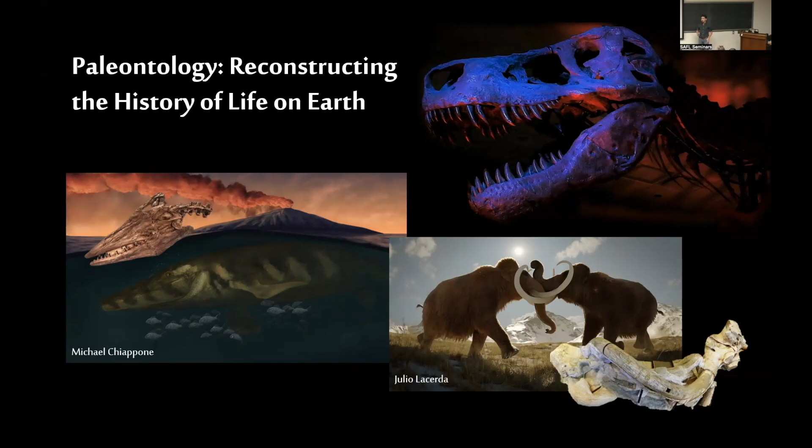Back in the 1940s, this guy, Ivan Yefremov, a paleontologist from Soviet Russia, pushed forward the idea that we need to understand where our data comes from, and invented an entire subfield of paleontology called taphonomy, which is my main focus as a researcher. He noted that taphonomy essentially concerns itself with the transition, in all its details, of organic remains from the biosphere to the lithosphere.

How does something that is alive become converted into the fossils that we actually pull out of the ground? That is what this entire subfield concerns itself with, from the moment an organism keels over and dies, all the way to when we pull it out of the ground in order to study it, and some people even argue beyond there into things like museum collections.

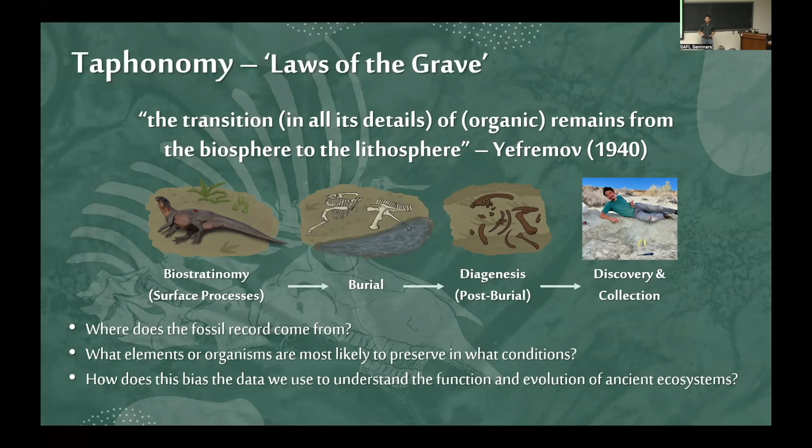Where does the fossil record itself actually come from, and what biases underlie it that we really need to be cognizant of when we're trying to understand how life on Earth has evolved? Within that realm, my specific area of study, which makes a lot of sense for SAFL, is the fluvial realm. In the terrestrial world, over half of all the vertebrate bone beds that have ever been found are from rivers and their floodplains.

If a bone is in water flow of any kind, it's often going to experience some level of transport, and if it's an entire skeleton, sorting based on what bone it is. This affects paleoecological hypotheses that we can actually make in the fossil record. Did the fossil assemblage that you're finding in a given place start out there? Did those organisms keel over and die in the local area, or have they been moved some distance that suggests that ecologically you can't trust that they lived there?

Are certain bones more likely to be preserved than other ones? That affects what data you have to work with. These are important questions for rivers specifically.

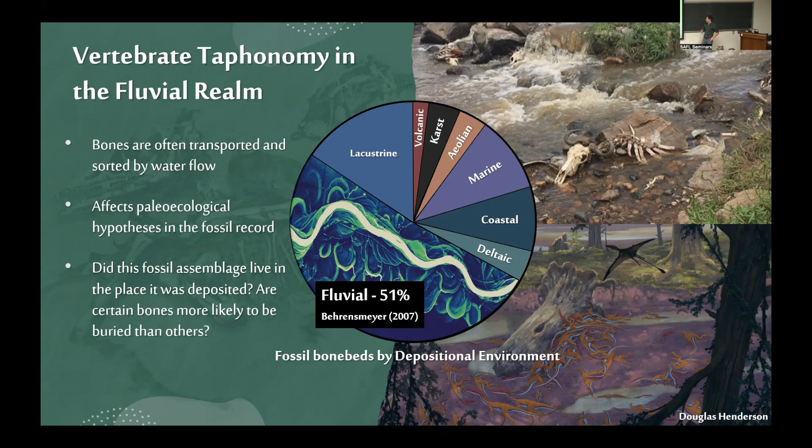It turns out that SAFL is kind of a perfect place to test this kind of thing through experimental methods, which among paleontologists are generally not common. But among taphonomists, experiments are actually a great way to examine this kind of thing. People have done things like decay experiments, transport experiments, burial experiments, all sorts of different things. And SAFL is uniquely positioned to explore questions about how bones move, sort, and bury in fluid flow.

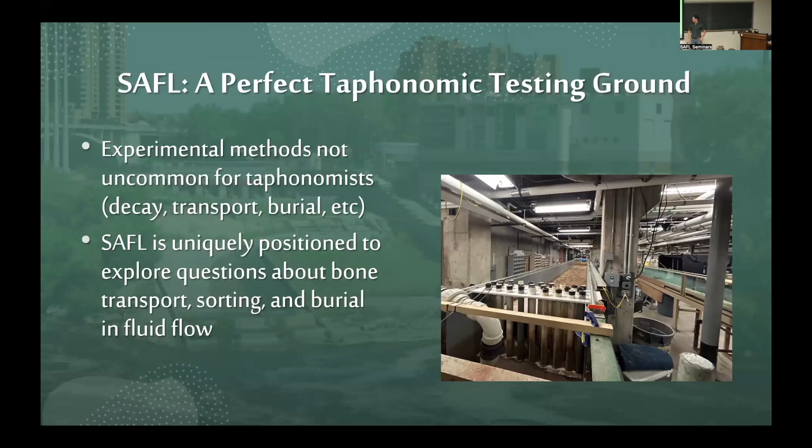That's where we started. Early on was in the main channel downstairs, the 3-meter wide by 80-meter long flume that we've got, where we decided to start by testing what kinds of different flows that people have never tested before can influence bones. In this case, we tested what happens when overbank flows like levee breaches, crevasse splays, can move bones that are out on the floodplain.

And potentially bury them in a situation kind of like what you see here, where this levee has broken and water is now spread out onto the floodplain, depositing sediment along with it. We found a lot of really interesting stuff in this work that I won't go too far into for today's sake. But know that this research is actually about to get published pretty soon here in the journal Paleobiology, so feel free to look for more on that.

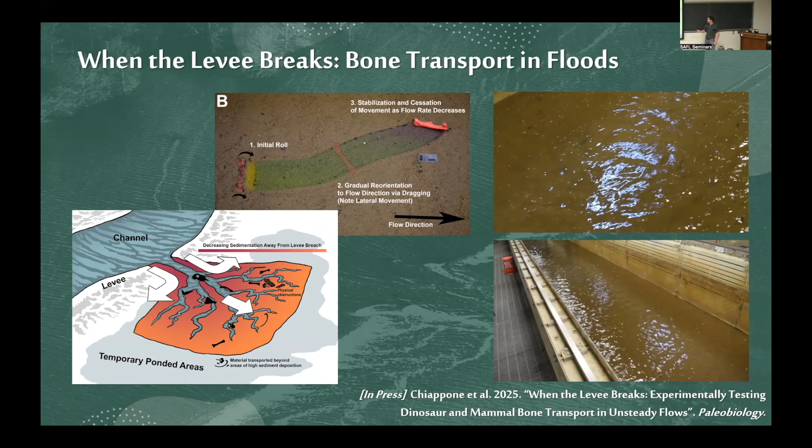Moving forward, what we've now kind of pivoted to is we've downsized our flume. We've ended up in what's called the tilting bed flume, one that's a little less than 1 meter wide, and really getting at the underlying processes that actually act to move a bone in any fluid flow, trying to see if we can predict, based on certain characteristics of the bones that we know, things like density, size and shape, what kinds of shear stresses it would take to move bones as objects, thinking of them less as organisms and more as weird sediments, basically.

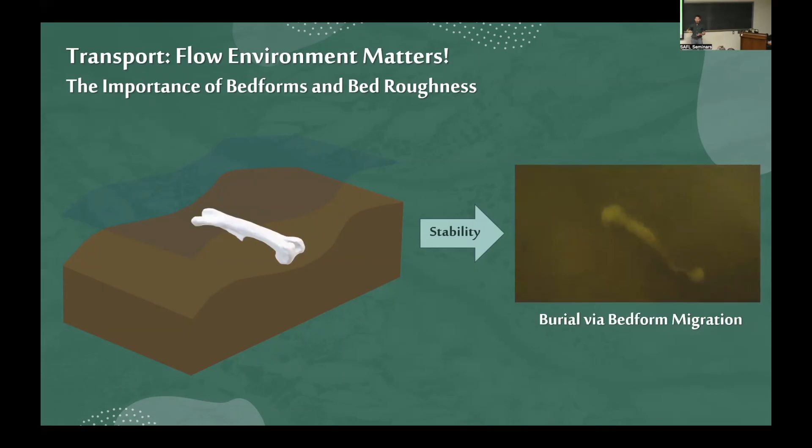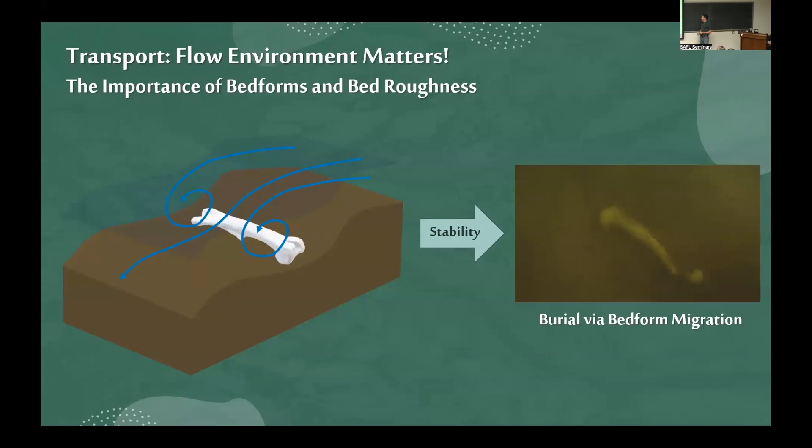We've noticed other things as we've done this more quantitative approach as well. We've noticed that bones have really important interactions with the bed form roughness around them, the things they're actually interacting with sediment-wise on the bottom of a river. Things like ripples and dunes that can trap them via eddying and things like that, as well as bury them for temporary lengths of time, sometimes permanent, by their ever-forward march downstream. On top of that, we've also seen the effects of something called scouring.

If you don't know what scouring is, if you've ever been to the beach and you've stood in the sand as a wave is pulling away from you and you felt the sand rushing out from under you, that's scouring. It's basically when sediment is mobile around an immobile object, and what happens is that you create eddies around the back of the object that slow the water down in these recirculation currents. What that can do is if you have larger sediments like gravel moving around a bone, they can end up caught in those eddies and redeposit on the downstream side of your bone.

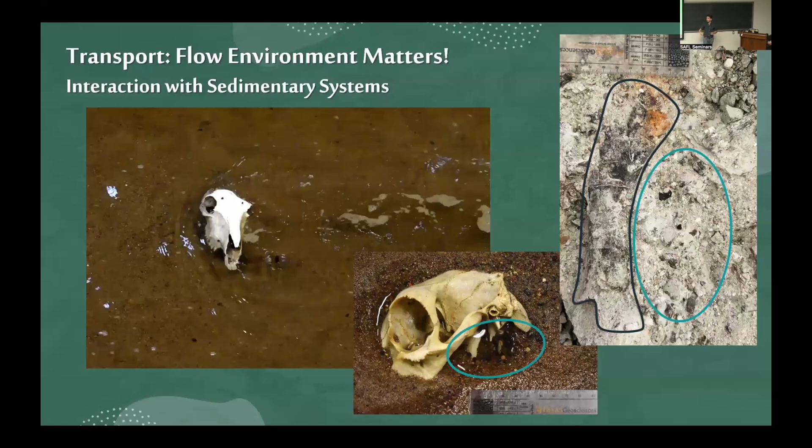Recently when I was out in the field, I saw this firsthand at a real-world dinosaur site, in which multiple bones showed packets of pebbles on one side, assumedly the downstream side. What we can do is combine this qualitative examination of fossil sites with the quantitative methods we're building, in order to see, for instance, if we know how much shear stress it takes for a bone to move.

We can compare that to how much shear stress it takes gravel to move, and test that scouring hypothesis. Would the gravel have been moving when the bone wasn't? Is the bone harder to move than gravel is? In this case, it turns out that it was. So it may be possible to use the surrounding geologic context to actually constrain flow conditions relative to the bones themselves that we see at real-world fossil sites, really taking this to a new quantitative level.

Overall, what I really want to emphasize today more than anything else is that the fossil record is humanity's window into understanding how ancient ecosystems functioned and how they evolved. These fossils that we use to understand the fossil record are found in a geologic context, which represents the landscapes they were deposited on. And because of this, understanding how fossils are actually preserved really impacts how we can interpret them and what data we can use for what purposes.

Not only this, but taphonomic processes actually still happen today, and they're used to learn about modern ecosystems and even sometimes human issues—things like forensics, and archaeologists use some of the same methods we do all the time. On top of that, fluid mechanics are also really important on complex shapes in general, not just bones. So this may also be applicable to other non-bone objects, especially cylindrical objects in fluid flow.

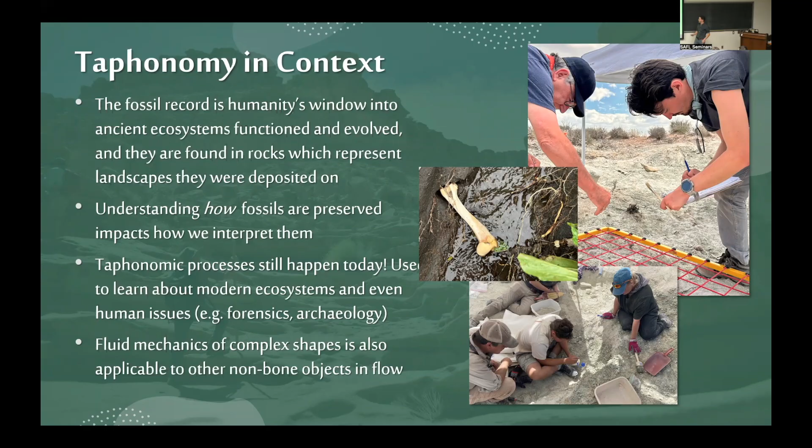And so with that, I will go ahead and wrap up. Thank you all so much for stopping by to watch, and that is just how the femur tumbles. Thank you.

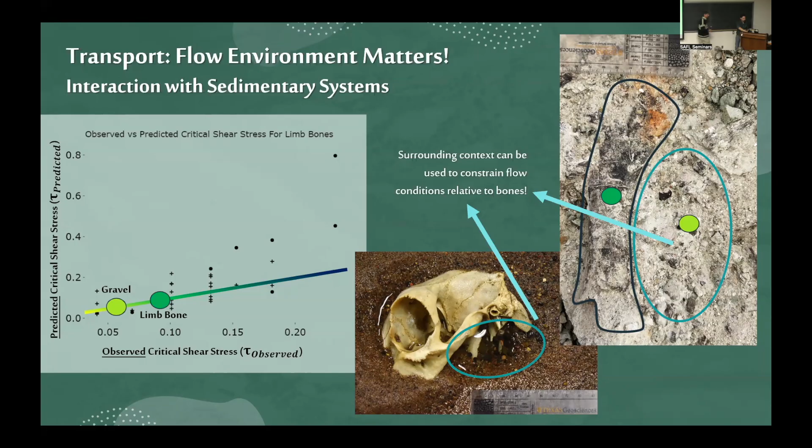Let's see, all right, just get that out of the way.

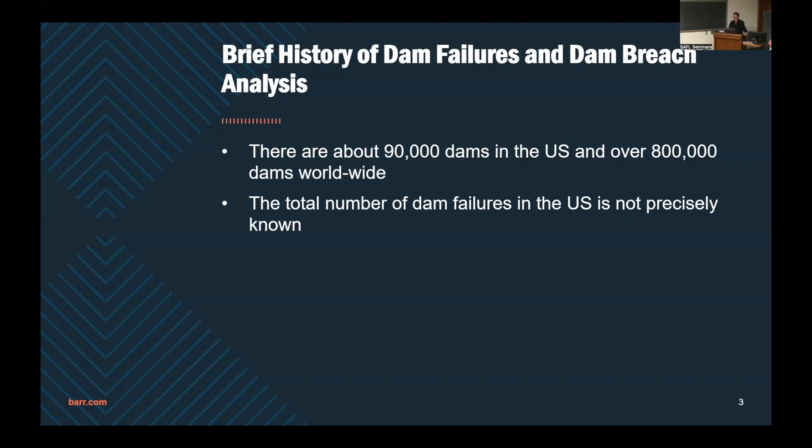But somewhere around 800,000 dams worldwide. And total number of dam failures in the US, we don't know it. But the National Performance of Dams program of Stanford University, they have been reporting there has been an average of about 10 failures a year over the period of record. And when we talk about period of record, the earliest dam failure on record goes back to 1848 for Bancroft Dam in Massachusetts.

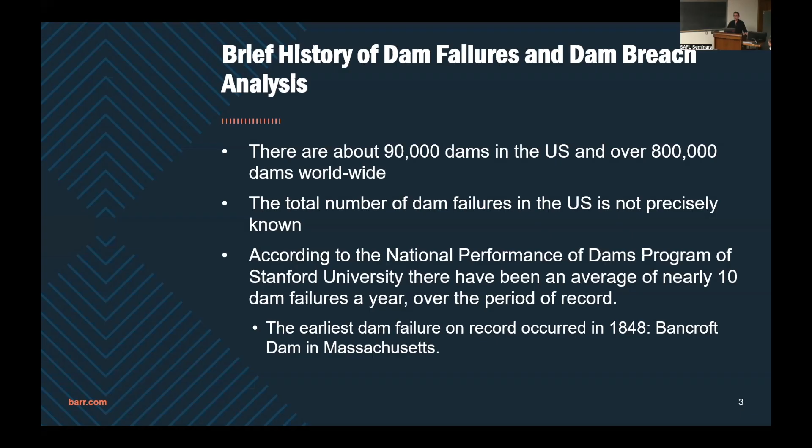The truth is, the majority of dam failures do not result in any fatalities. Something around 96% of them, they don't. It's a very small percentage of those dam failures that have fatalities. And not all dams fail - at least based on the records that we have, not all of them fail. It's true that humans have built dams since 5,000 years ago, and many of them are not there anymore, but there's still some from the Roman era.

So I'm going to bring up some important dam failures. These are all water retaining dams that happened in the United States. The first one is 1874, the Mill River Dam in Massachusetts, which resulted in 139 fatalities.

Then in 1889, the South Fork Dam failure in Johnstown, Pennsylvania. This is actually close to where I'm living, in Pittsburgh, a little to the east. This dam actually failed twice, and the second time in 1889 was probably the worst event as far as fatalities related—more than 2,200 people died in that failure.

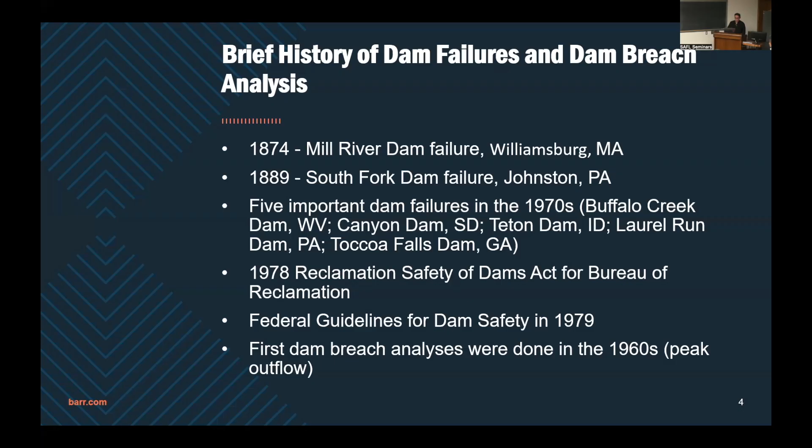As part of that, dam breach analysis began. But dam breach analysis did not start in the 1970s—it started in the 1960s due to some failures that happened in California.

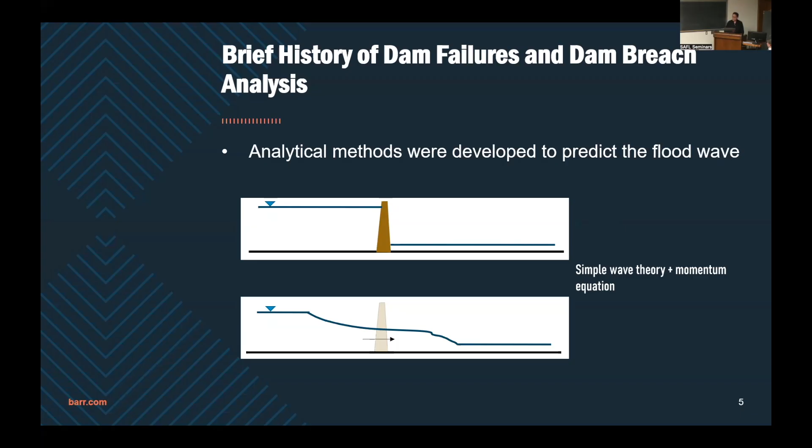Initially, there were analytical methods, and these were quite simple because they had to find a solution to the problem. Looking at a channel as a hydraulic problem, you have an obstruction in front of water, and if you remove it, there is a flood wave that travels downstream. They did this using simple wave theory plus the momentum equation, with no dissipation of energy—it would basically tell us the height of the flood wave and the speed of the wave going downstream. Then, in the 1980s, they started developing computer programs and empirical parametric models based on previous records.

In addition to that, a lot of physically based models were developed. The main one was BREACH, developed by Fread. Fread is known as the father of dam breach analysis. The first dam breach model program was prepared by Fread, and the physically based model for breach development was also by Fread. It looked at erosion—shear stress and the material of the dam and how it would erode.

Then software programs started coming in—1980s, 1990s, 2000s—and it was not easy to work with these programs. The National Weather Service dam break model was quite a challenge to work with, until HEC-RAS came with a nice GUI. I know when I talk about these things, for many of the younger graduate students here it may seem a little foreign, but things that seem very easy to work with today were not easy at that time. That's a fact. And for your information, many of them are still not easy to work with when it comes to dam breach, because of the hydraulic problems associated with them.

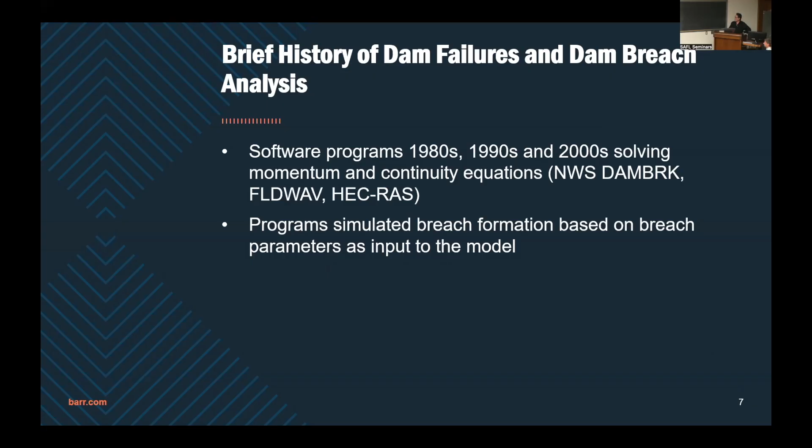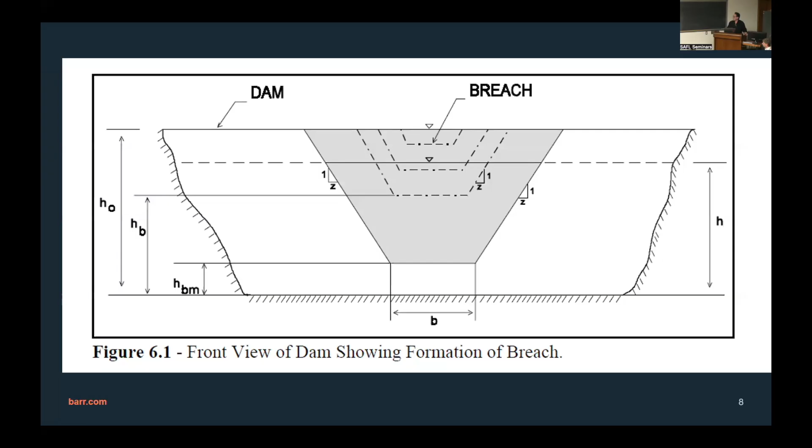So the programs also started developing for the breach formation. In all these programs, they would simplify the story, saying this is basically a trapezoidal shape, and if you have overtopping, this trapezoid would start developing from the top all the way extending to the bottom and also expanding laterally. Some simplifications, trying to address the problem.

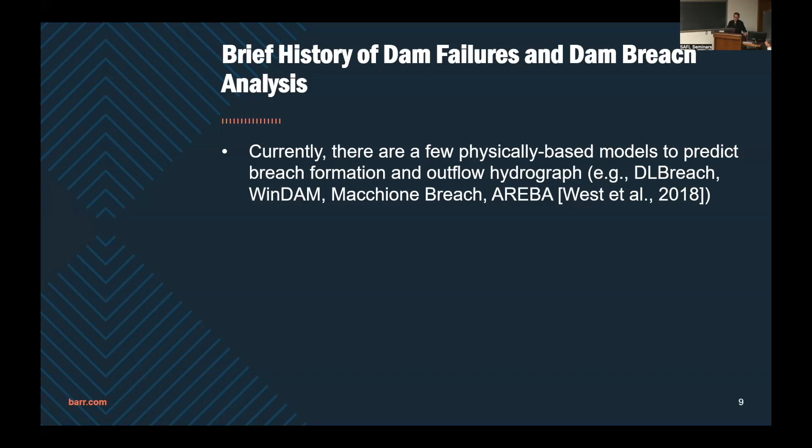Right now, we have a number of physically based models just to predict the shape of the breach. I've put some of these models here - probably the one being used most effectively is DL Breach, but there are a number of them out there. And there are lots of hydraulic models for just routing the flood wave.

Right now, we are using a lot of two-dimensional hydraulic models. It doesn't mean these models are there and they're doing a good job - you just put the input data, run it, and get the result. It doesn't work like that. Still, it's a lot of work, a lot of challenging questions, a lot of glitches. Sometimes things do not work the way you want because of all the data - we can collect a lot of data, provide a lot of details, we have other challenges, but by and large, we are doing a good job. The only thing we have problems with is just the breach shape.

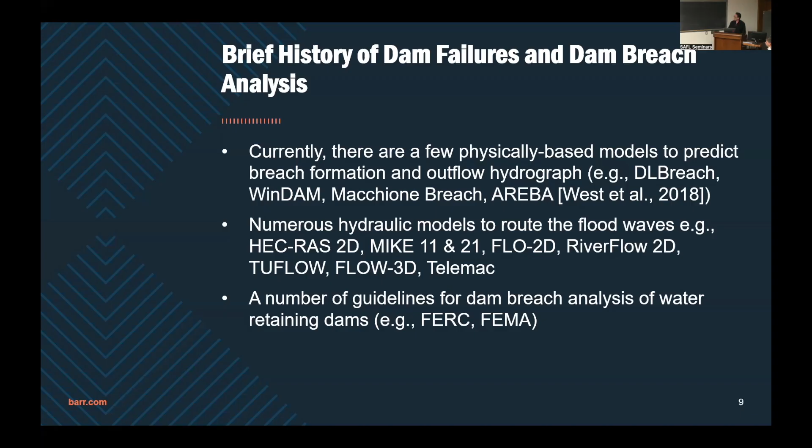In addition to that, we also have a lot of guidelines, especially from the federal government - FERC and FEMA - they have guidelines on how to do the dam breach analysis.

So now this is the question: what is currently understood about dam breach analysis for water retaining dams? The truth is we cannot predict exactly how a dam fails. We can simulate a dam breach analysis, but don't think we can predict it. We can't have the precise timing and extent of the dam breach - we can't forecast that, but we can go with the worst case scenario. We can say if the dam fails, what would be the worst case scenario? Based on that, we can use it for emergency action plans or emergency response plans, and that's also based on past events.

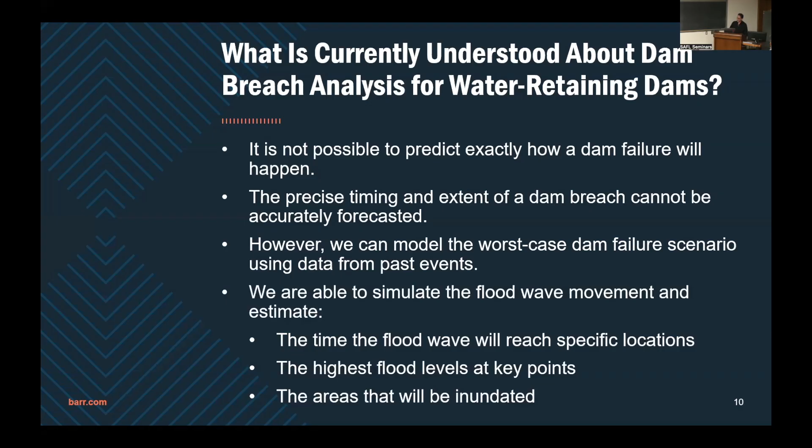And we can simulate the flood wave movement. We can get the time of flood wave reaching a specific location. We can tell what is the highest flood levels at key points and the areas that would be inundated. All these things are for developing an emergency action plan, whose main goal is establishing some monitoring system to detect potential failures, defining responsibilities for emergency responders and dam owners, and coming up with a warning system and evacuation system with inundation maps.

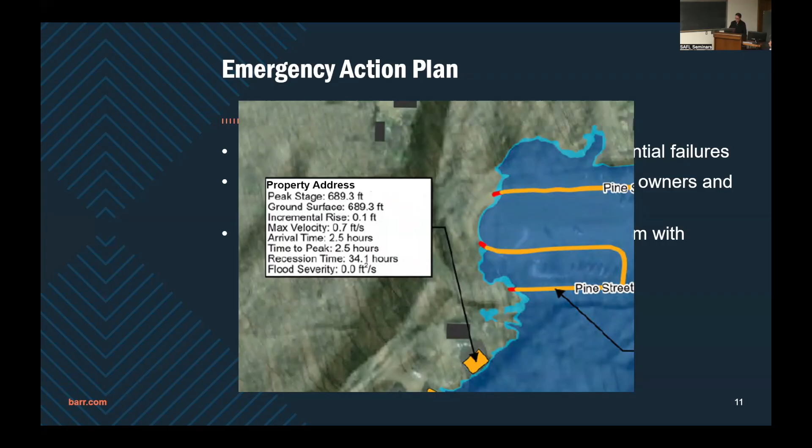But there are probably buildings for some dam failures that would experience a large increase in water level. We can provide these maps that will be used for emergency response plans, and eventually for preparing rescue, recovery, and termination of the emergency. We can do all these things, so we are in a good position with respect to water retaining dams. The main puzzle we have is just the breach formation - we make a lot of guesswork for that.

So we're good. What about tailings dams? Are they any different? Let's talk about tailings dams.

Tailings dams are used whenever you have a mining operation, whether underground or on the surface. You take the ore to the processing plant, which separates the minerals and brings the waste, putting it in a basin. Often the basin is constructed by making an embankment. They create a basin and bring the material, the waste, from the processing plant and dump it there. Because they often pump it, you get a little pond on top, and the tailings, the waste, at the bottom.

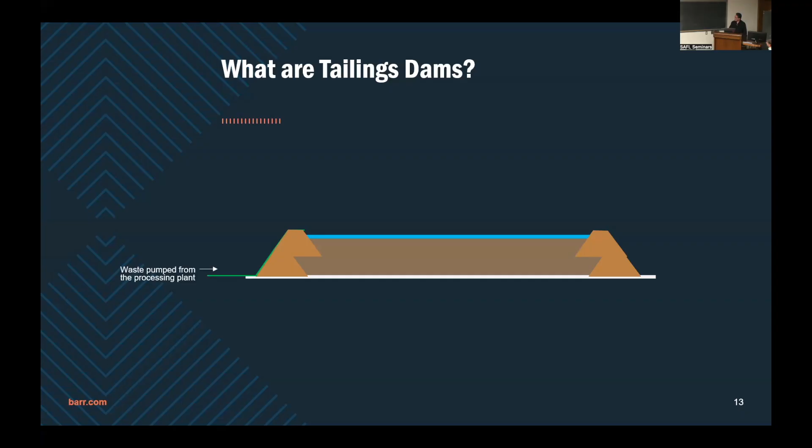They fill it up, and when it fills up, they may raise the embankment and put more on top. This becomes a tailings basin, and what you see around it becomes the dam. The pond is called the supernatant pond.

The method of construction is sometimes upstream. It's called upstream construction because they start with a starter dam, fill it with the tailings waste, and when it's filled, the next raise or lift of the dam sits on the waste that was already deposited there. So part of the dam is on soft material, or material that's not strong enough. These dams can go up quite a bit in height - you may see 100 to 200 foot high dams built on the waste. So it makes the dam not necessarily quite stable.

But there is also the central method. In the central method, they build on top and extend it to the downstream side, so part of the dam is on the ground, making it much more reliable. In the downstream method, there is nothing built on the tailings at all. This is much better than the central method with respect to firmness, stability, and our trust in the safety of the dam.

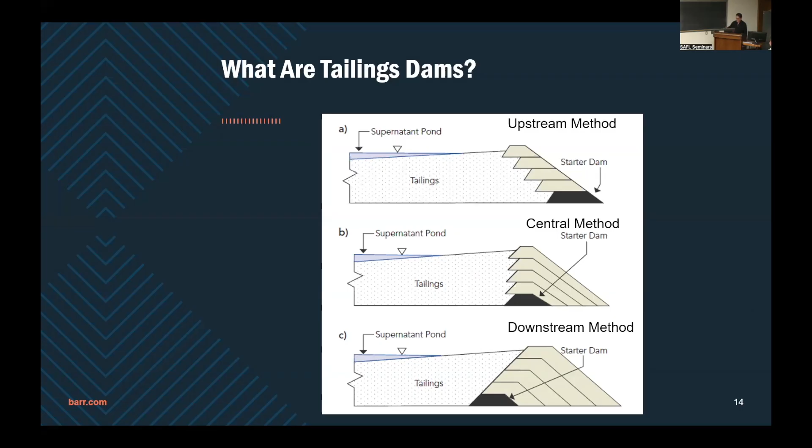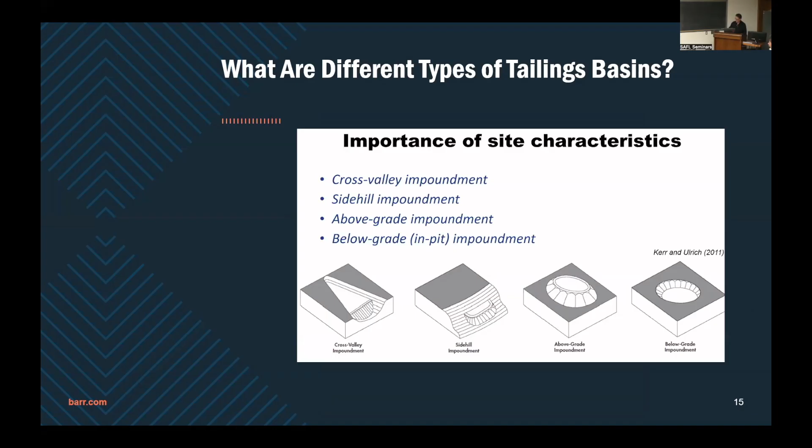Dams can be built basically on a cross valley. It can be in a side hill impoundment, or above the ground, which is a ring dike. Most of the dams in the Midwest, in Minnesota for example, are ring dike or above ground. As you go west, the mountainous area will have side hill construction. There are also some that are below grade - those are not dams anymore, just a tailings basin.

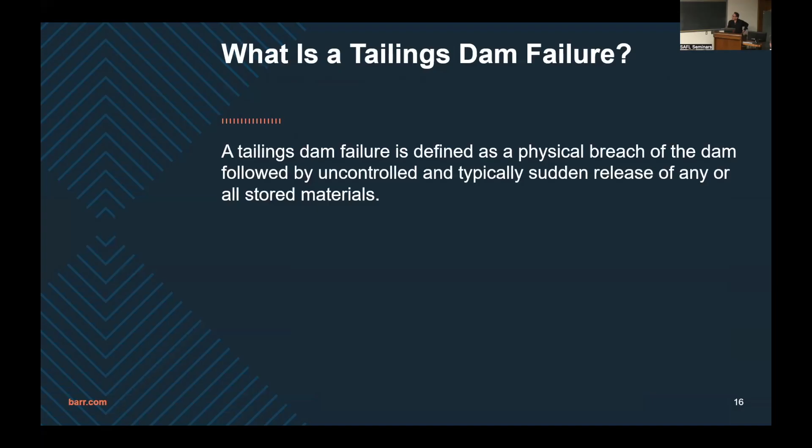When we talk about the failure of a tailings dam, the first part is very much the same as any water retaining dam. But then there's also the uncontrolled and sudden release of any or all stored materials. That's what makes the failure of a tailings dam quite different.

Going through a little history of tailings dam failures - this is my own selection, it doesn't mean other sources would give you the same list. Some recent ones, in my opinion 1960s is recent, I know for many of you it's not. In China, at Huogudu, about 3.3 million cubic meters of tailings was released with more than 170 fatalities. And El Cobre, Chile - 0.35 million cubic meters of tailings but 200 fatalities. So as you can see, it's not just the volume - the setting, the presence of communities, the topography, and the height of the dam all can have an effect.

That happened in 1965. In 1972, Buffalo Creek, West Virginia - 500,000 cubic meters, 125 fatalities. Italy, 1985 - 0.2 million cubic meters, 268 fatalities. China, 2008, Taoshi - almost 2 million cubic meters, 277 fatalities. And 2019, this was a big one - Brumadinho, 12 million cubic meters with 259 fatalities.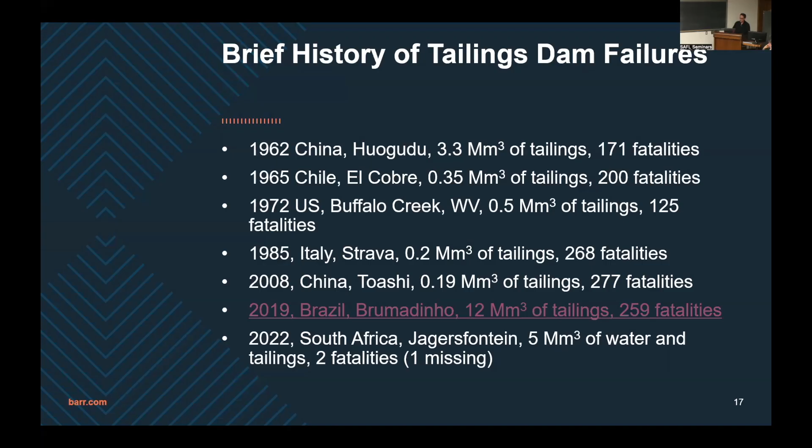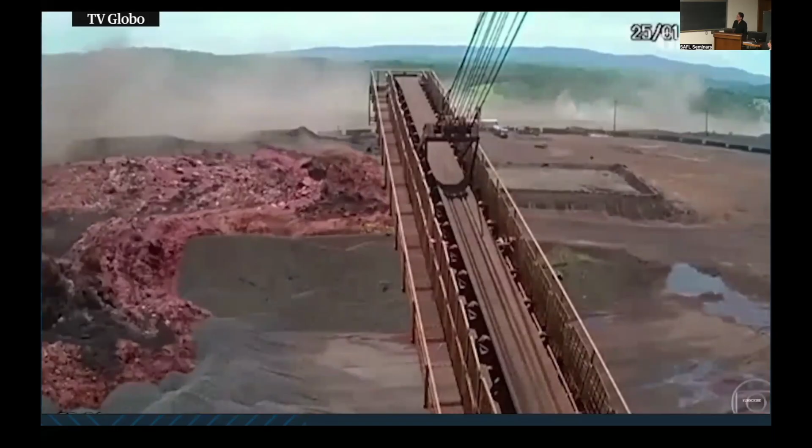In case you haven't seen this video, I'm going to show it to you to give a little perspective on a tailings dam failure. This tailings dam was not active. It happened in January of 2019. They had cameras installed at different locations - this is one of the quite unique cases where that happened, which is why we have videos of this dam failure. We don't have this type of video from any other failure.

Actually, that triggered quite a bit of effort on tailings dam breach analysis. A global industry standard was developed in 2020. CDA, the Canadian Dam Association, published the first bulletin in 2021. I don't think it was in response to that bulletin for tailings dam breach analysis. It started in 2015 and was completed in 2021, but the draft was referenced in the global industry standard on tailings management.

A short section was allocated in 2022 in the Tailings Management Handbook, a life cycle approach by the Society of Mining, Metallurgy, and Exploration. And then the International Commission on Large Dams, ICOLD, also published a bulletin - I think it's 2024, if I'm not mistaken. No, 2025. This one is 2025.

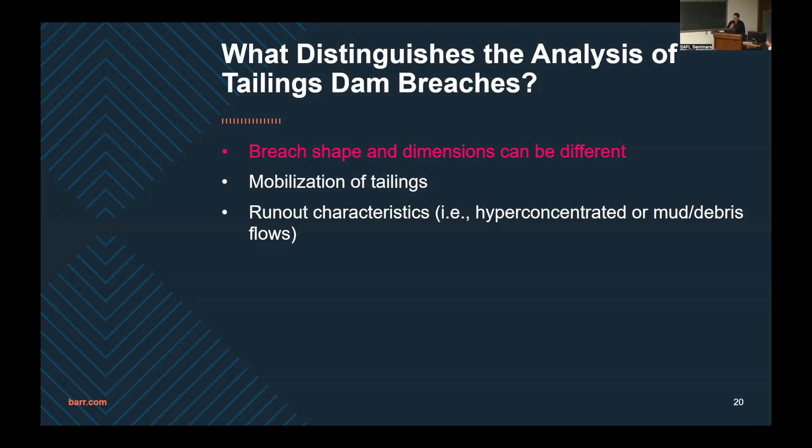The problem is the process is very complex. I'm going to try to show you in a cartoon why it becomes complex. What we saw for Brumadinho was a specific case. In most cases, what we're dealing with - it doesn't mean it's always like this - you have some tailings and some pond on top. There may be no pond, as we saw, and the tailings may not have the same characteristics as Brumadinho, but we can have quite a range. I'm going to show you why it becomes quite a challenging problem.

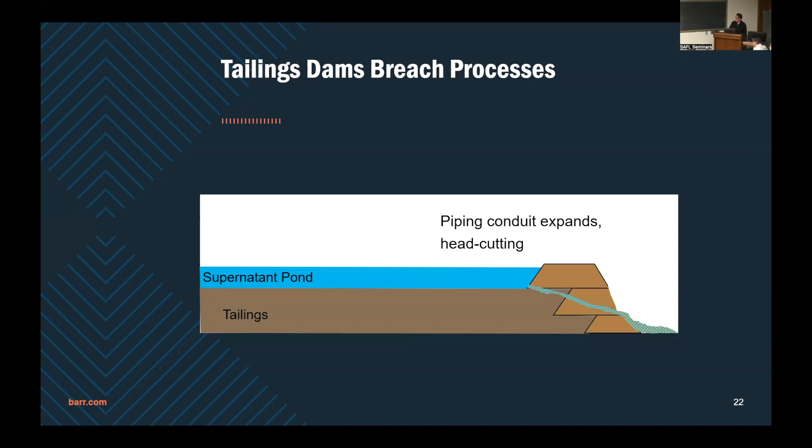Let's imagine we have a tailings dam with some initial piping, and that initial pipe conduit expands over time, causing head cutting at the downstream end. At some point it collapses that conduit, causing settlement of the dam, and you get overtopping, then the dam is washed out because of all the pond water coming out and washing off the dam. You get quite a bit of muddy flow or hyper-concentrated flow coming out of it.

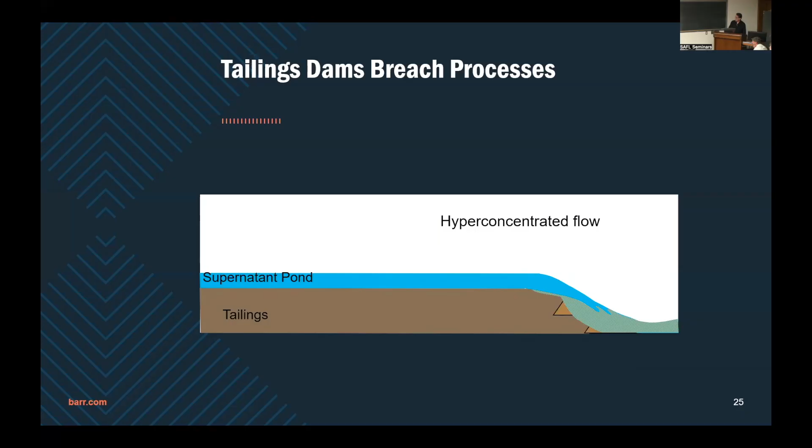But then, because of the stability problem with the tailings behind it, you may see an initial backscarp or just unstable tailings standing there. And when that happens, if the tailings are liquefiable, you may see liquefaction of the tailings, and then even more material comes out. How the liquefied tailings, the eroded tailings, and the water mix and come into play is a question that's not easy to answer. Right after that, if the pond is still there, you will have knickpoints causing more erosion, and more material comes out. So trying to get all that right is quite a challenge.

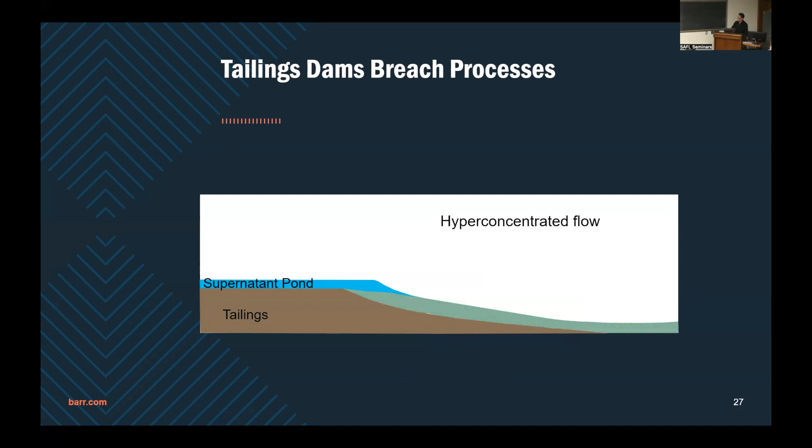And when this problem started being studied, we ran into lots of questions. But the first efforts were done by Rico back in 2007. What she did was look at 29 tailings dam failures, and she came up with a nice, simple linear regression. And she said, you know what...

About 35% of the volume of the material in a tailings basin will be mobilized, and that's what we can use. Initially it was used by some people, but after some time it was challenged because there were cases where only 1% of the material was mobilized, and in some cases the entire basin was mobilized. So everybody thought that this database was not a good one to build on, but this may not be the case.

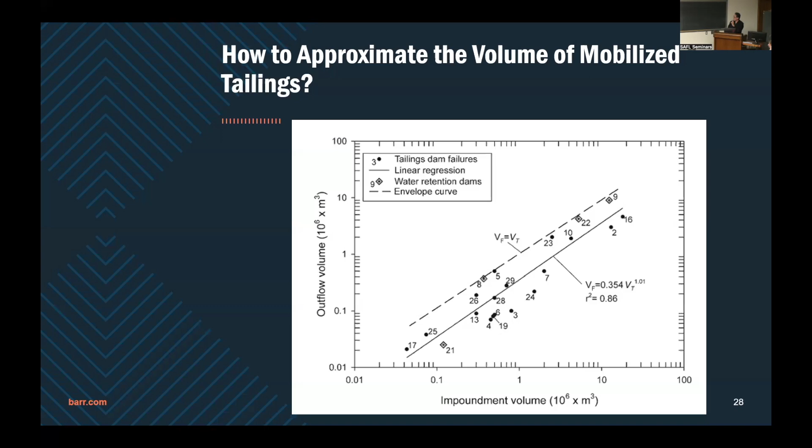So when CDA started working, they had a working group for tailings dam breach analysis. It was a combination of hydraulic engineers and geotechnical engineers, and there was quite a bit of effort to see how we can bring the estimate of mobilized tailings into the picture.

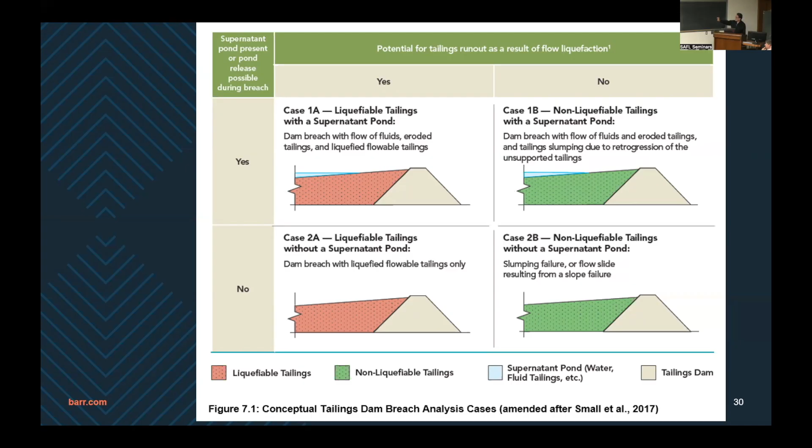Now if you look across this, 1A and 1B, the tailings is basically liquefiable for 1A, and for 1B it's not, but both of them have a pond. So for the ones with a pond, you definitely have erosion when the water comes out. With the ones that have liquefiable tailings, you can have liquefaction when the dam fails. The last one, 2B, is neither liquefiable nor erosional because there's no pond there, but if the dam fails, it becomes more like a landslide - more like a geotechnical failure that you can take a look at.

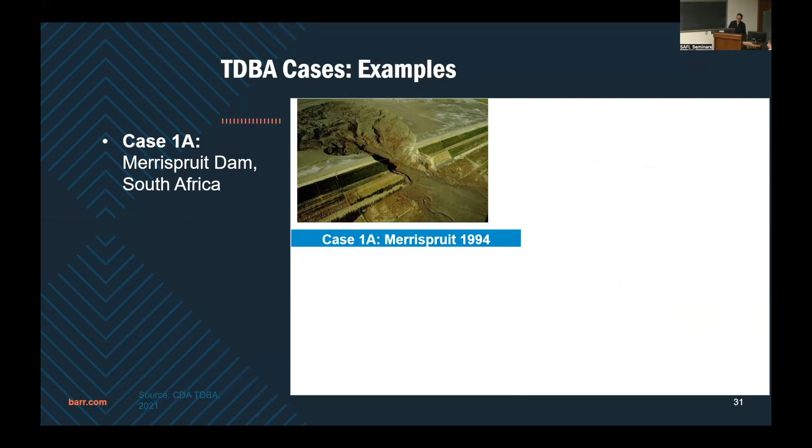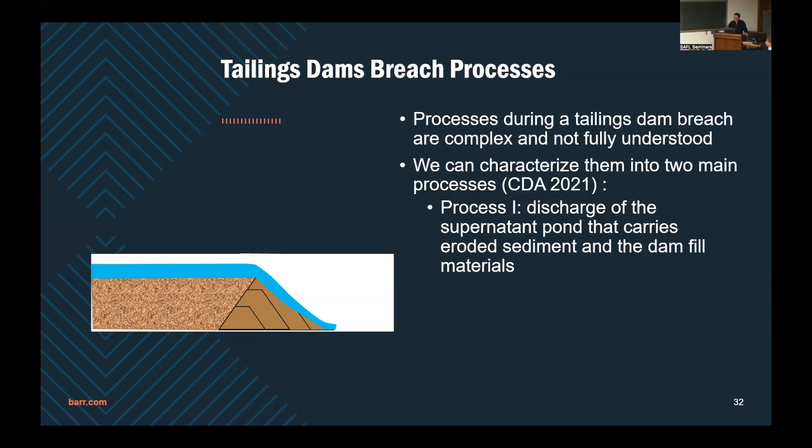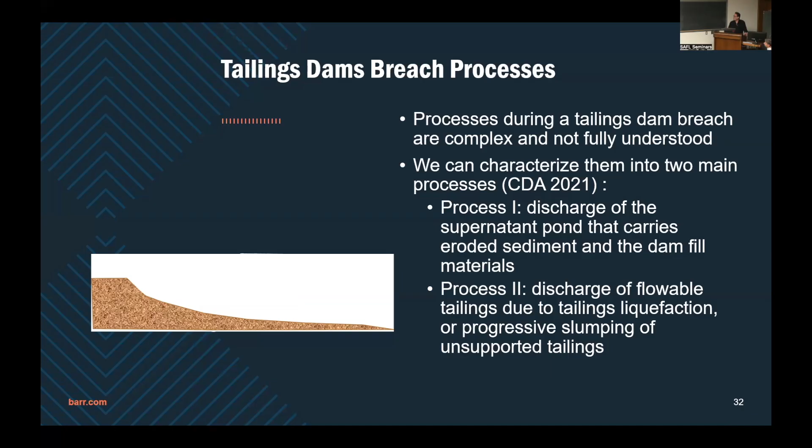So in CDA, they simplified it - because the problem is complex, we can simplify it and define two main processes. The first is the discharge of the supernatant pond, which basically brings out all the eroded sediment and dam fill materials downstream - that's process one. Process two is basically the discharge of all the flowable tailings, either due to liquefaction or progressive slumping. So these are the two processes that we can tackle in order to do the dam breach analysis.

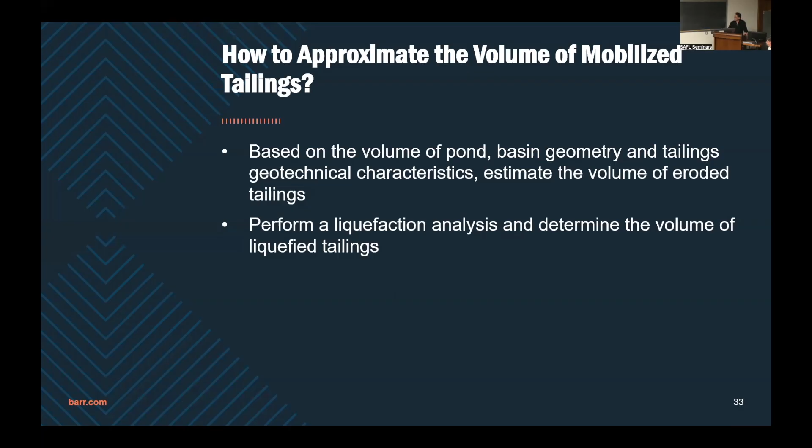So how do we approximate the volume of mobilized tailings? We can do it based on the volume of the pond - the water that we have there - the basin geometry, and the tailings geotechnical characteristics. Based on those, we can estimate the volume of eroded tailings. We also have to do some analysis to see if the tailings are liquefiable, do some liquefaction analysis, and determine the volume of liquefied tailings. So this is all quite a bit of work and help from geotechnical engineers.

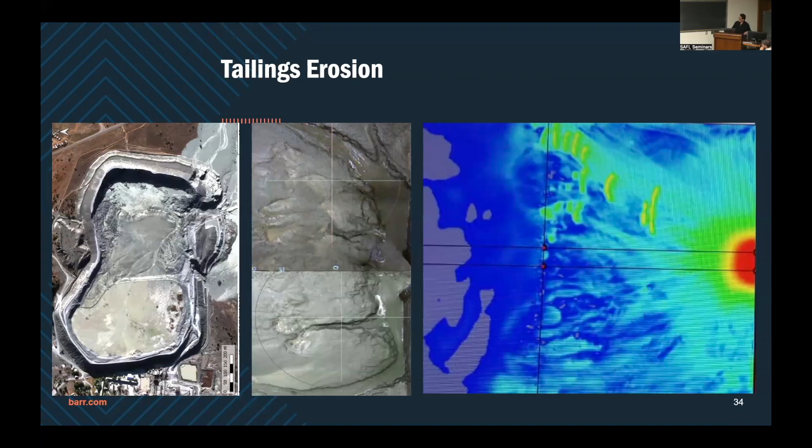I think this is an experiment done at Queen's University. This was basically looking at - I don't know how well you can see it - they put a notch here. This is the plan view, you're looking at everything at the basin. There is sediment upstream, but they put a notch and initiated the breach. They were looking at just the erosional processes.

If you focus, see how there's a cone of depression here, and you can see how it's going to expand as the breach basically advances and progresses.

As you can see, the failure that you see from the side of the channel of the breach - these are all geotechnical failures. When you try to come up with a model of only looking at the erosional processes, you miss these stability problems that you can run into.

So if you want to do a good job with respect to predicting dam breach formation, sticking just to hydraulic characteristics and shear stresses is not going to work. You have to look at the stability of the side slopes of the breach as it expands.

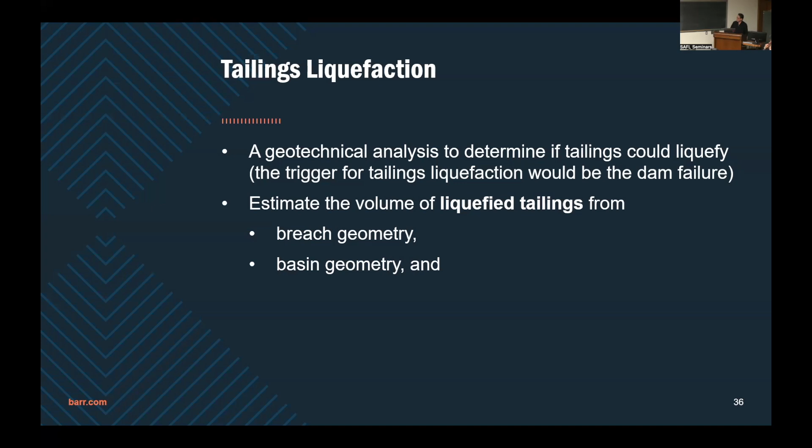So we can estimate the volume of liquefied tailings from the breach geometry, from basin geometry, and also the characteristics of the tailings. So if we have a ring dike, based on the breach opening and the characteristics, we can figure out what part of the basin is going to be mobilized.

There will be an initial backscarp, and with the liquefaction or basically progressive slumping of the tailings, we can estimate how much more tailings would be mobilized. In this case, we are trying to basically give you an example of the liquefied tailings.

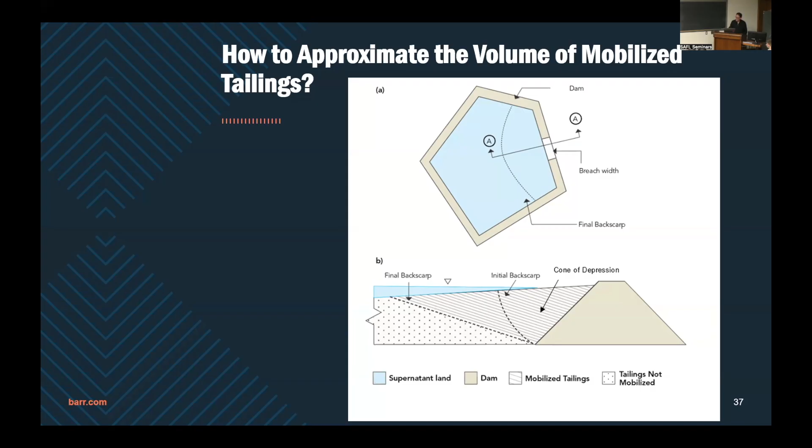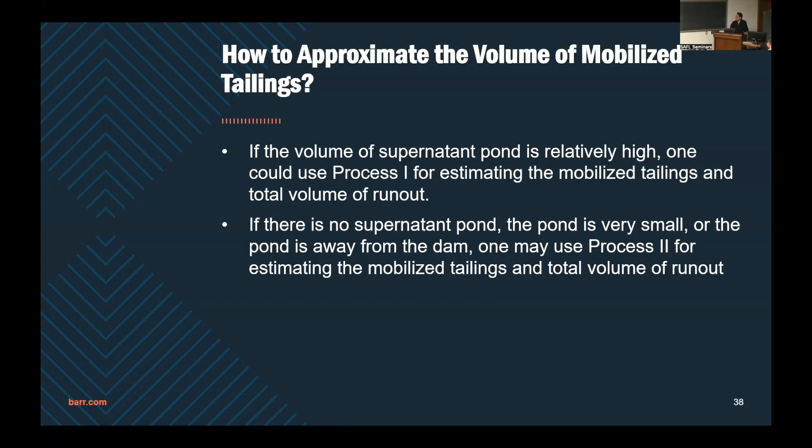We can also simplify the problem based on the characteristics we run into based on the supernatant pond. If it's quite a large supernatant pond, we can claim that that process one that I talked about is dominating, and just focus on that. But if the pond is too small or far away from the breach location, we can ignore that and just focus on process two, especially if we think that the tailings are liquefiable.

But in many cases that's not the case, and we have a pond, and we have tailings that are liquefiable. We can come up with an alternative approach: basically come up with these estimates and say that all the tailings that are liquefied and are eroded get well mixed with the water and they all come as one entity. In reality, they don't, but it's the easiest way to deal with it.

And if we do, now we have one fluid coming out of the system. We can model the flow of that fluid, and we can look at the impacts. That is an important part of this whole thing to make it work.

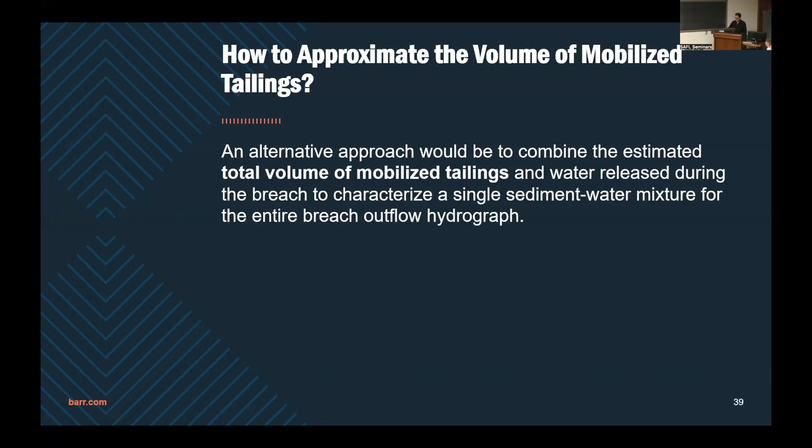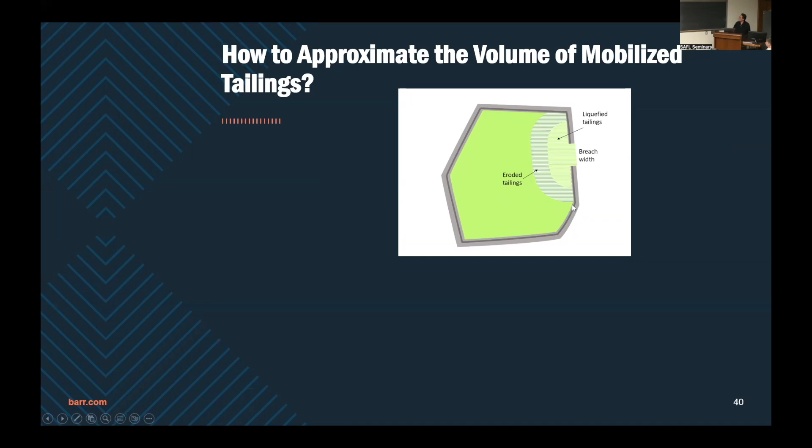So now if this is the basin looking from the top, and that's the breach opening, we can estimate what part would liquefy and what additional part would basically erode because of the volume of the water. In cross-section, if that's the dam, we will have some initial erosion of the first part.

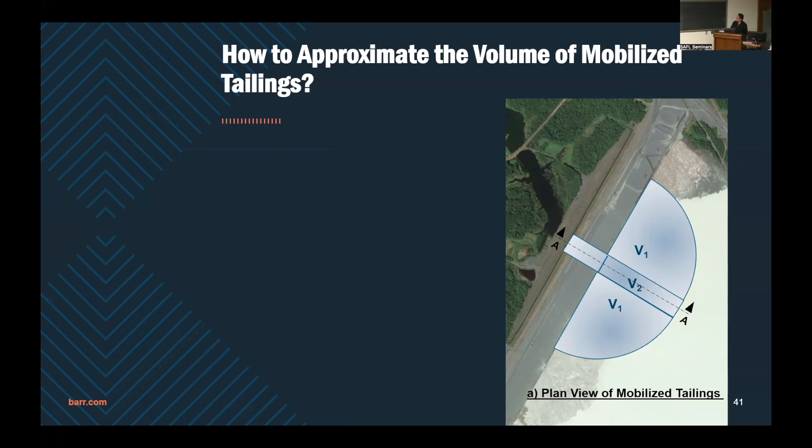But this will be the part which will be liquefied, and the next part behind it will be eroded, and we can estimate those. So what we do is we basically can use the residual shear stress ratio of the tailings material and just approximate that slope of the post-liquefaction failure, and use that to come up with the volume that would liquefy behind the dam.

If that's the opening, we will have a parallelogram, which I'm showing you by V2 on the plan view, and two quarter cones of V1 on each side. I can estimate those and use that as the volume of the tailings that are mobilized, and come up with the volume of the tailings which are also eroded, and tell you what is the total volume of runout.

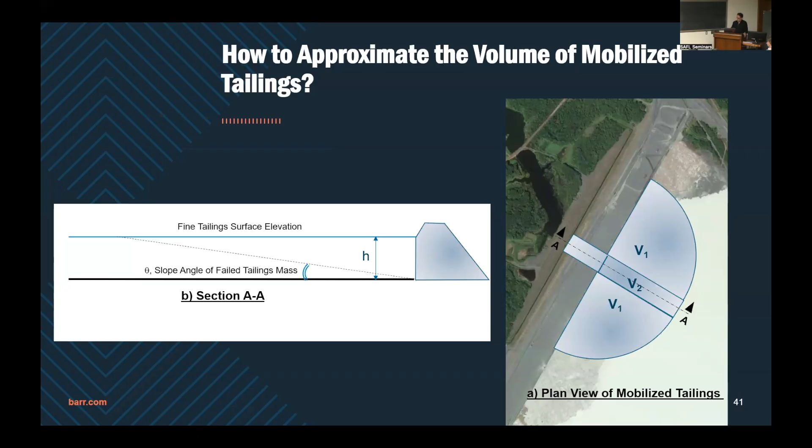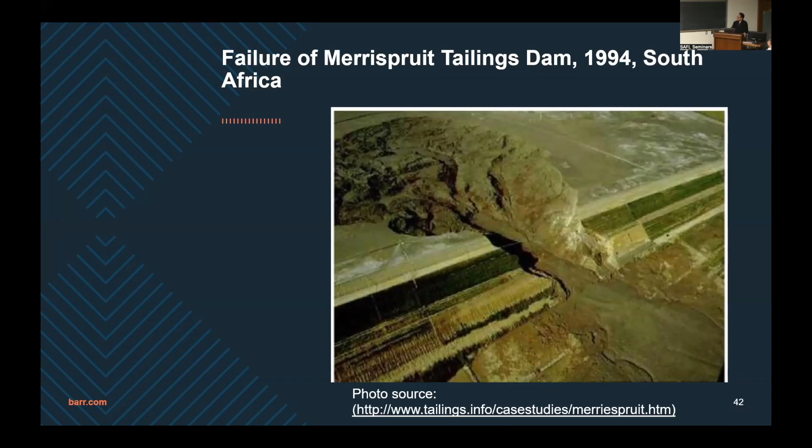That shape that we are showing, even though it's a simplification, it's not too far off, because we see similar to that in some historical failures, like Merrispruit back in 1994 in South Africa. Based on the geometry of the basin, it may not be two quarter cones on the side - it depends on where the breach is and what shape the basin has, and you can come up with those estimates.

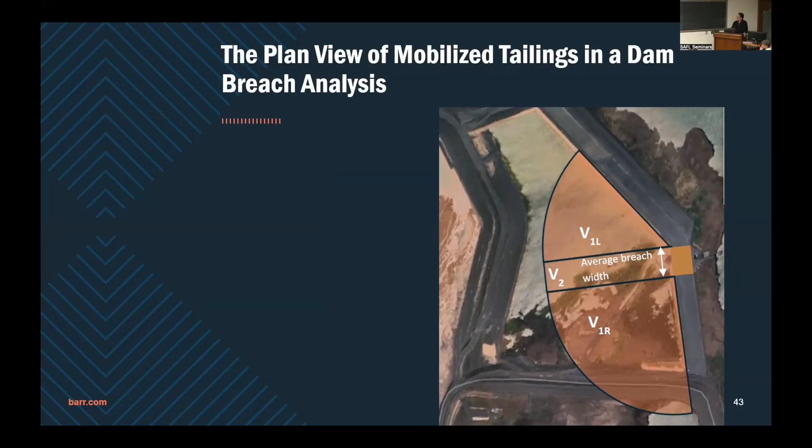But one of the other questions that came up is, what if the failure mode is foundation liquefaction? We may be able to, under certain circumstances, combine process 1 and process 2 and come up with the volume of the mobilized tailing. This is going to be a special case.

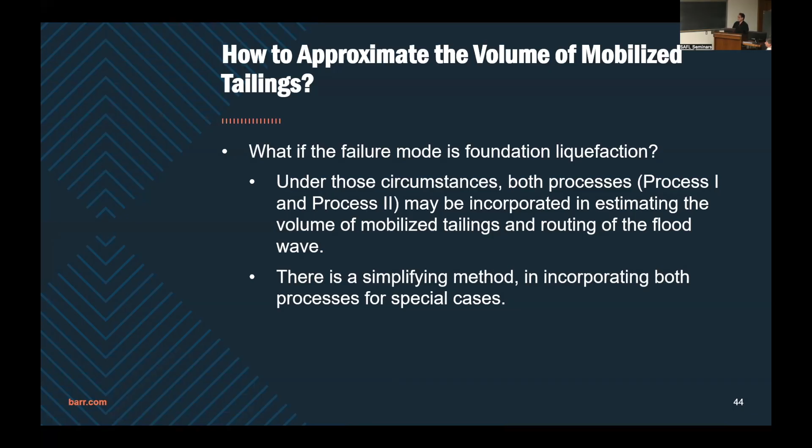The truth is, if you have an embankment dam with water behind it, and you have a foundation failure with settlement of the crest, at some point it may settle such that the water exceeds the crest and goes over it. As the deformation extends, this becomes more, and you will have water coming out of the basin. So we can use the same concept, doing this in two steps.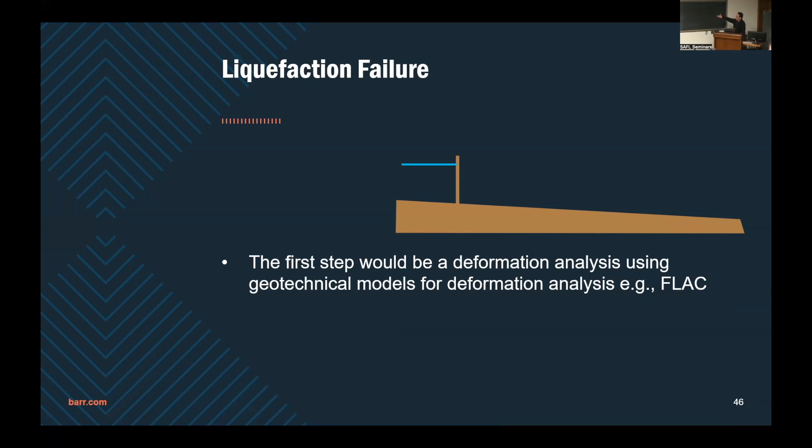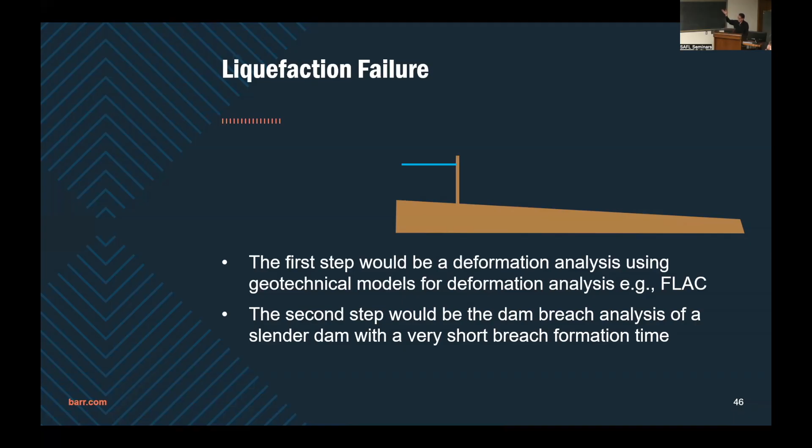The first step is doing the deformation analysis, looking at the liquefaction of the foundation and how the whole thing deforms. Then assume we have a very slender dam on top of it and breach that. This is like overtopping, and we can incorporate the erosion of the sediment, the tailings behind it, running out of the basin.

So we will have a new geometry, and there will be overtopping because the crest is going to drop. But like any big dam that overtops, you will have a section of it that gets eroded, and that would be used to discharge the eroded tailings and the pond. You can simulate it like that.

The truth is, this part is arbitrary right now. It can be moved to the right or left for some sensitivity analysis to see which case would be the worst.

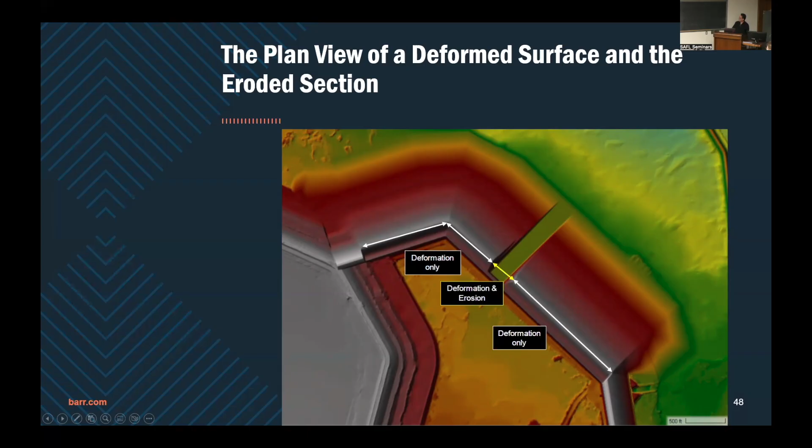So this was all about the mobilization of the tailings. The next one, which is different, is the runout characteristics. There are only a few slides left. I know I was told I can only talk until 4:15. I'm going a little bit over my allocated time, but it's going to be done very soon.

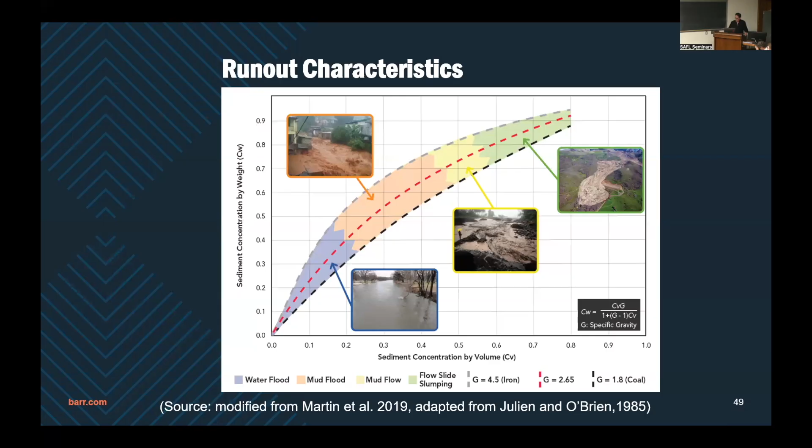If it's a water flood, it has a viscosity similar to water, but when it becomes a mud flood, the viscosity changes. This is based on the work that O'Brien did, but the data O'Brien provided comes from the National Research Council work back in the 1980s. There is a little bit of a range, but this can tell you, based on the solids content, how it behaves and what you need to consider with respect to runout.

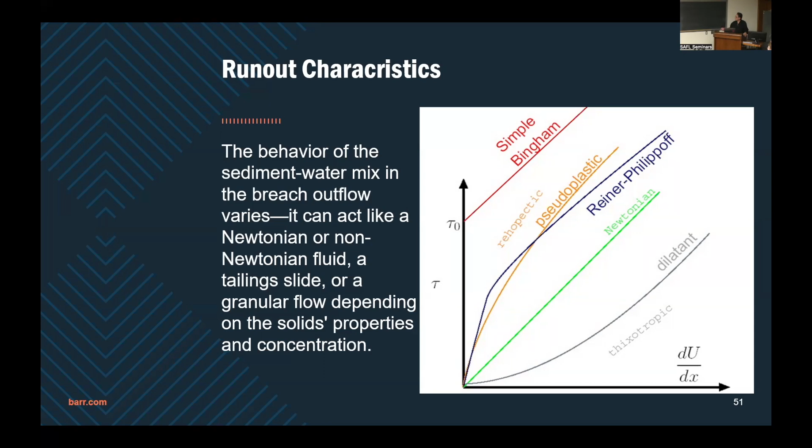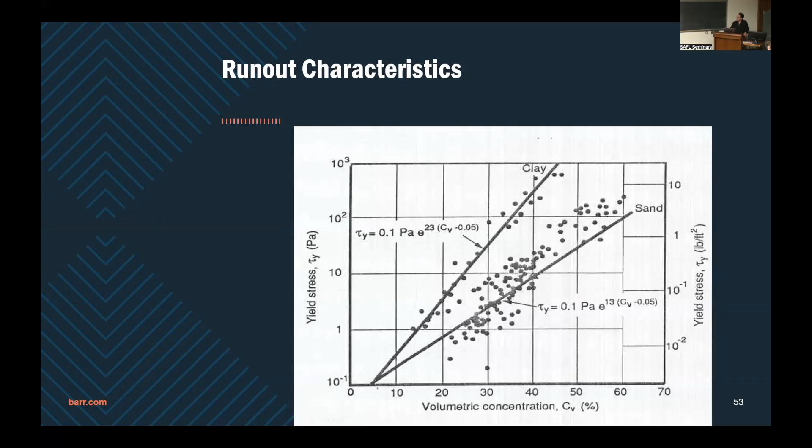Same thing with respect to the yield stress. And we can collect these data based on what we know and basically incorporate it into our model, or the momentum equation. And this is the general momentum equation for water flow.

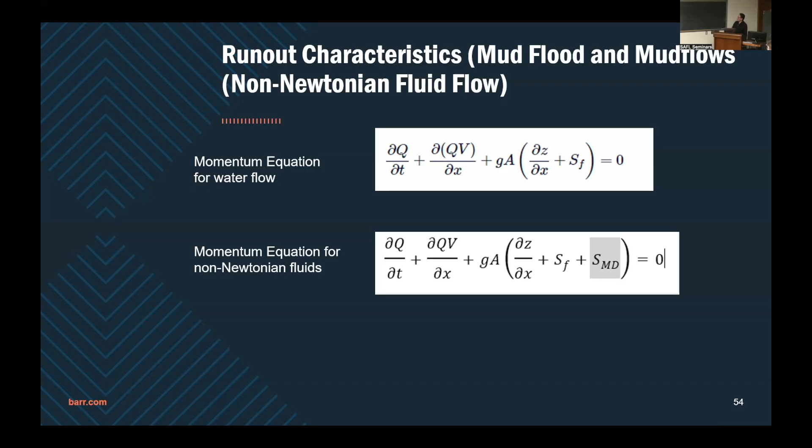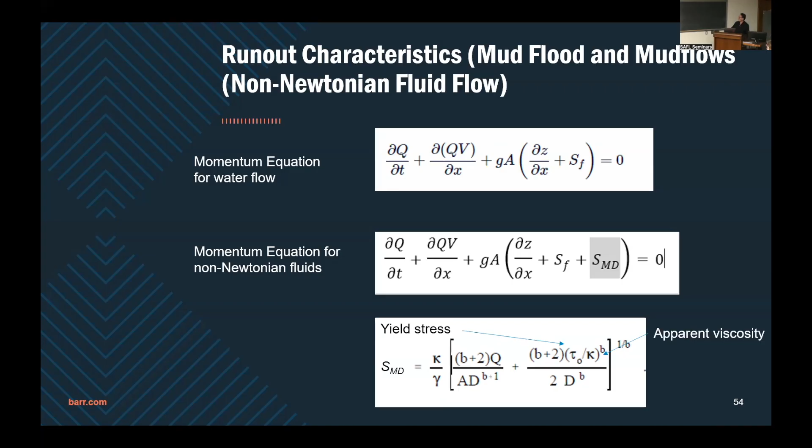And you can estimate SMD based on the yield stress and the apparent viscosity of the fluid and modify your momentum equation. And that's what basically most of these models do. And it gives quite a bit of a different scenario and different results.

This is a hypothetical tailings basin, but in a real topography - that oval shape is the tailings basin. What you see as light blue, yellow, pink, and green are four different types of tailings. If the tailings were all water, blue would have been basically the...

pattern of showing the inundated areas after 24 hours if the dam would breach. And the yellow, pink, and green are with different kinds of rheological characteristics with respect to the solids content. So you can see the CV of 0.45 is just at the beginning of being non-Newtonian - that's the green one. It would reach after 24 hours that red line first.

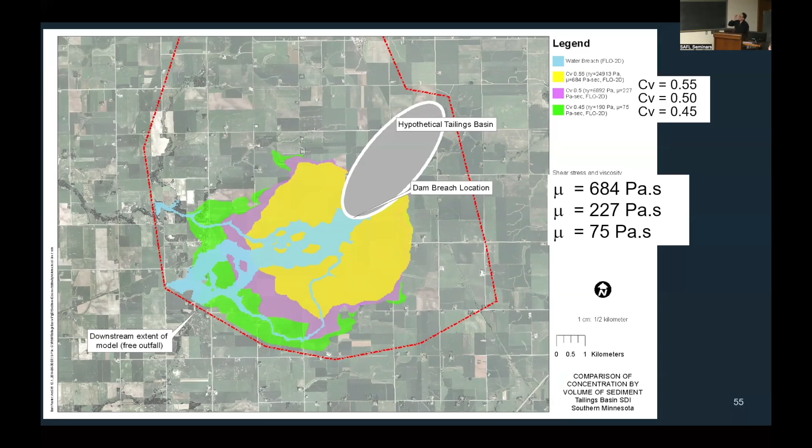But if the amount of solids content increases to 0.5, you see that it doesn't expand much. And the truth is what happens, it's much thicker too, and it moves more slowly. You can't say if I assume water, this is going to be more conservative. Not necessarily, because you are missing a lot of areas which could be impacted if the tailings were behaving like a non-Newtonian fluid. So that's why it's really important to know how it behaves to really determine what areas are being impacted and what would be the depth, and what we could have - either fatalities or economic losses - due to dam failure.

So the main thing for doing a tailings dam breach analysis is to estimate geotechnical information related to tailings, identify potential failure modes, and then go through estimating the breach parameters, defining the cases, whether it's 1A, 1B, 2A, 2B, and then assess the mobilized volume of the tailings and come up with a breach hydrograph and route it downstream.

Come up with something like that. This is just an example. The tailings basin is shown with a breach location. A river is moving from the right of the screen to the left. The light blue shows the inundated areas as a result of this tailings basin breach.

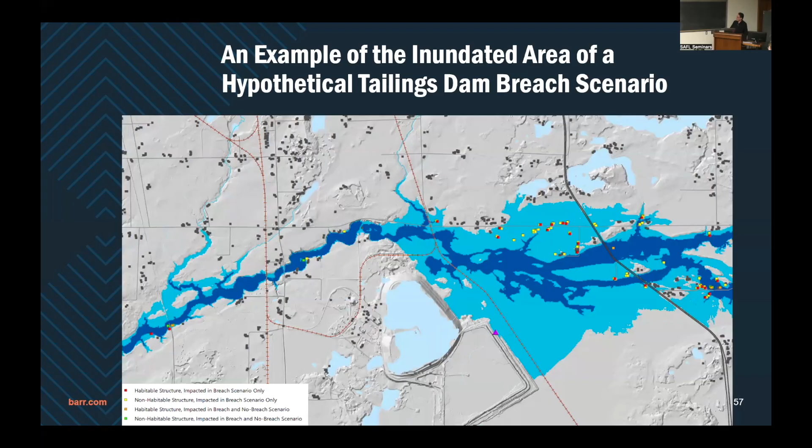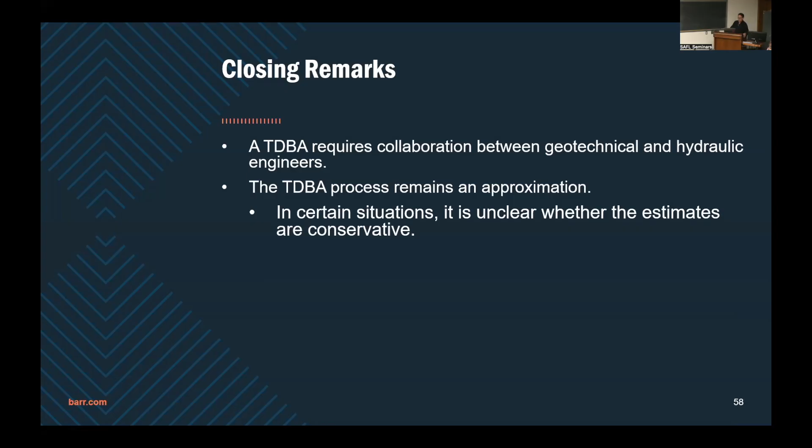So I'll close it out - tailings dam breach analysis basically requires, it's very different from what we used to do for just the water retaining dam breach analysis. It's basically work together between geotechnical and hydraulic engineers. It's still an approximation, and in certain situations we are not 100% sure that we are being conservative because of lack of our knowledge and understanding.

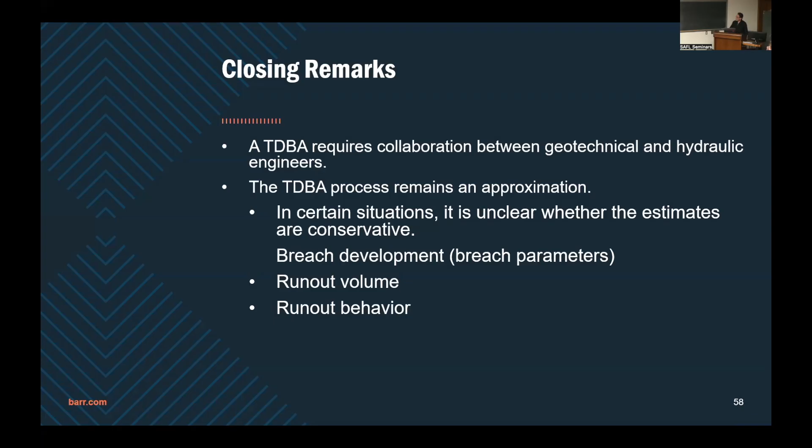And that comes primarily with respect to the breach development. And still, even though we can approximate the runout volume, there are quite a bit of uncertainties with respect to that and the runout behavior. We are simplifying the problem.

And that's the main thing. As engineers, you're always asked to find the solution to your problem, and what you do is you find a solution to the problem with the hope that your solution, given the state of knowledge and resources available to you, is the best solution. But having in mind that if you're told you need to come up with a solution in 1 week or in 1 month or in 3 years, the solution is going to be very different because of all the time that you have to spend on the problem. At the same time, it's also important what we really know about a lot of physical processes around us that we can incorporate. Thank you.

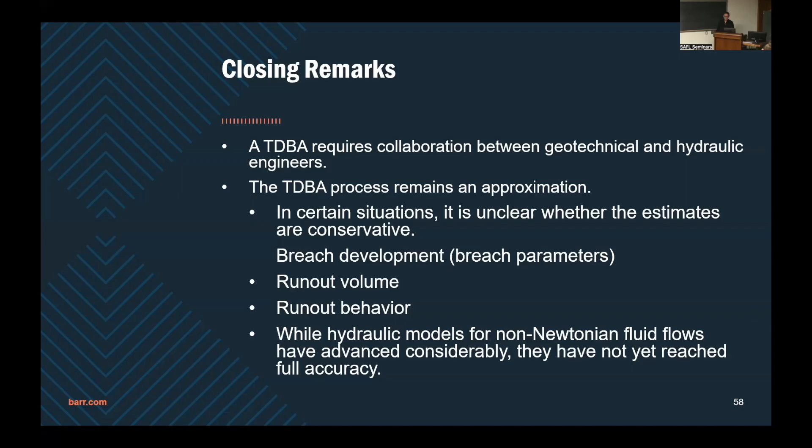So, Omid, you mentioned that a liquefied mobilization of liquefied sediments is not possible through a hydraulic model, and I'm wondering what the main reason is. Oh, because you don't have the stresses enough to make it liquefy.

You may be able to do dynamic liquefaction. A lot of the dams that fail, they have static liquefaction, and you will have a hard time simulating static liquefaction. But you can do a dynamic liquefaction. So if you make a model and you have basically a floor with something that you can shake it, you can make them liquefy. But that is different. Why we can't do this for this type of problem?

There are dams that we know of that the failure is because there was an earthquake. So the earthquake was the reason of the failure. And because the earthquake occurred, there was a dynamic liquefaction. Because of the type of construction, the system started just failing because of that liquefaction. It was the dam and the tailings. That happens. But in many of these cases, like in Minnesota, we don't have much of a seismic force to cause the dam failure.